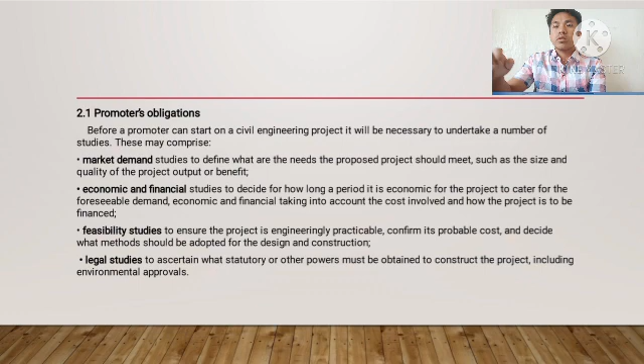These include market demand, economic and financial feasibility studies, and legal studies. Let's go on to 2.2 Importance of feasibility studies.

Feasibility studies of an engineering nature are needed for most construction projects. In the initial stage, the studies usually concentrate on various options for the location, design, and layout of the project. Site investigations are particularly important, and sufficient time and money should be spent on them.

The feasibility study should include a close examination of data on which the need for the project is based.

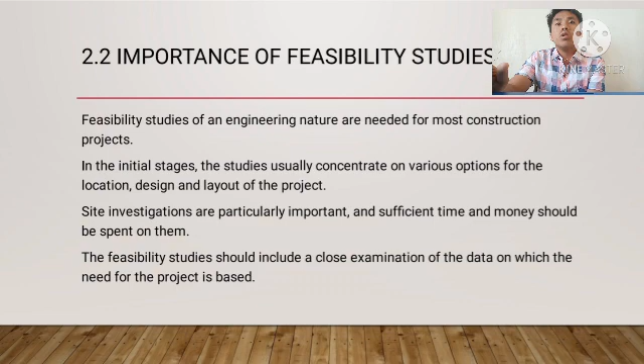The feasibility studies should include a close examination of the data on which the need for the project is based. Let's go on to 2.3 Options for design. There are four kinds. Number 1 is design by promoter or a consultant. Number 2 is outline design provided with details designed by others. Number 3 is layout design by promoter, and number 4 is functional specification by promoter, design by contractor.

Let's go on to design by promoter or consultant. The whole of the design, including all drawings and specifications, is completed before construction tenders are sought, except for drawings not needed for tendering purposes, such as for concrete reinforcement.

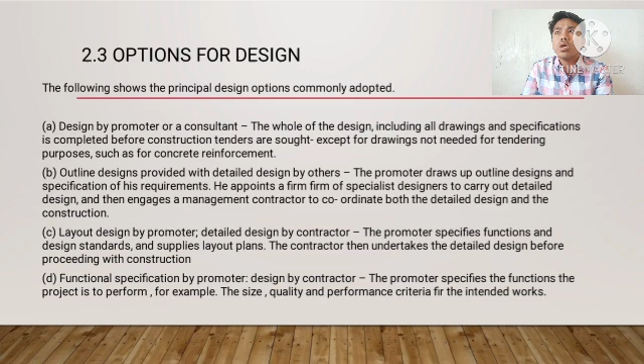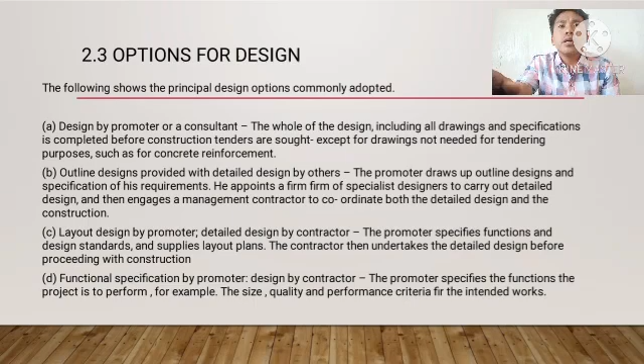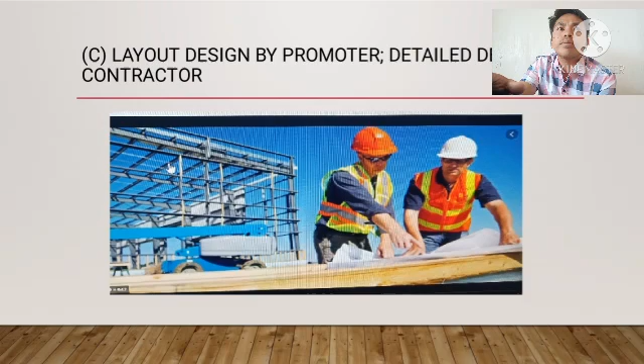Let's go on to the pictures. Design by promoter or a consultant. Outline design provided with detailed design by others. Layout design by promoter, detailed design by contractor. And functional specification by promoter, design by contractor.

Let's go on to specialist suppliers. They need to design their product or services to suit the project. Here are the advantages: the promoter can check all aspects of the design to ensure they meet his requirements before construction starts. Number 2 is competitive tenders for construction are obtained on a clearly defined basis, encouraging construction contractors to

submit the lowest price. Number 3 is the risk of having to make alterations to the work during construction is minimized, giving a better chance of the project cost not exceeding the tender price. The promoter is not committed to proceed with construction until he sees tender prices and accepts a tender.

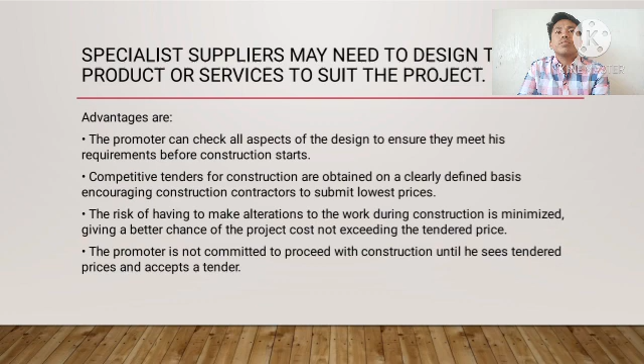Let's go on to design and construct. Design for a water tower. The advantages are the contractor can adapt the design to suit his construction equipment. His usual construction method enables him to tender his lowest price. The cost of making design alterations during construction does not fall on the promoter.

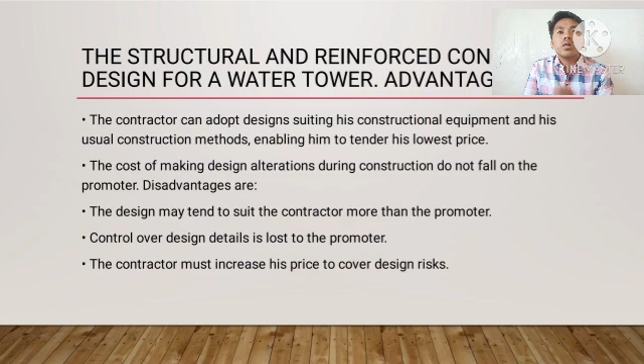The disadvantages are the design may tend to suit the contractor more than the promoter. Control over design details is lost to the promoter. The contractor must increase his price to cover design risk.

Let's go on to 2.4, option for construction. 2.4, option of construction.

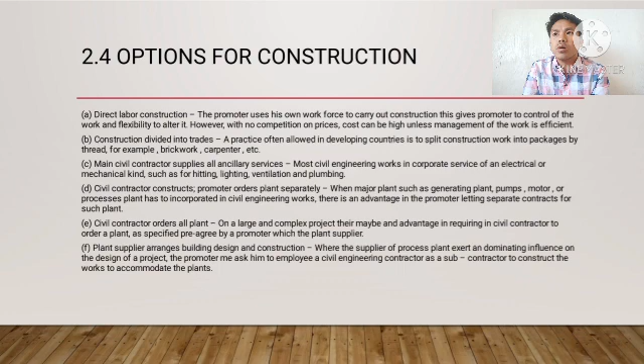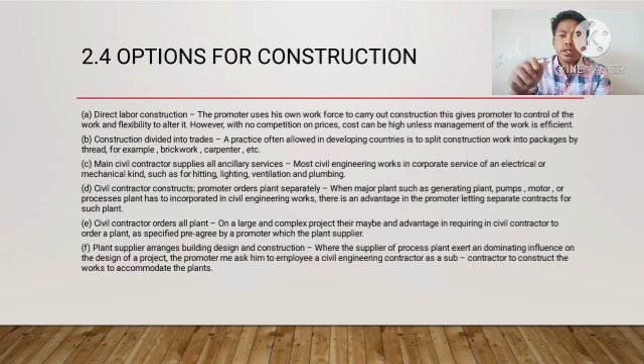Let's go on to (e). These are the advantages: the civil contractor can be left to arrange delivery of pieces of plant to suit his construction program; number 2, the civil contractor has direct contact with the plant supplier to agree to the details of any storage or lifting requirement; and the promoter avoids the risk of delaying the contractor by the plant supplier not delivering in time.

Disadvantages are: the plant supplier will not start manufacture until the civil contractor places the order. To complete the civil works design, the promoter may have to pay the plant supplier a fee for providing layout drawings in advance. If the promoter asks for some alteration to the plant, or a works test on the plant shows the need for some amendment, delivery may be delayed, causing the civil contractor to claim for delay. The plant supplier may increase his charge if he thinks his risks will be increased by having to rely on the civil contractor's payment.

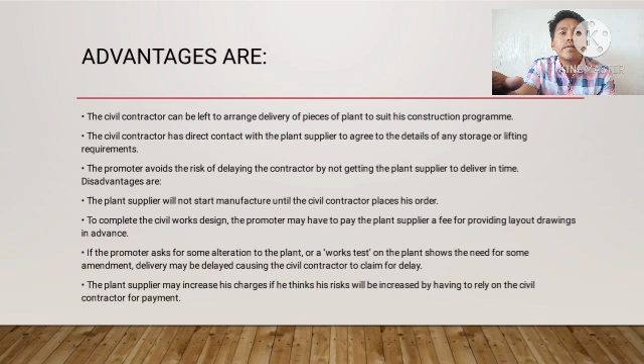If the plant supplier arranges building design and construction, where the supplier of process plant exert dominating influence on design of a project? The promoter may ask him to employ a civil engineering contractor as subcontractor to construct the work to accommodate the plant. As I said earlier, plant supplier arranges building design and construction.

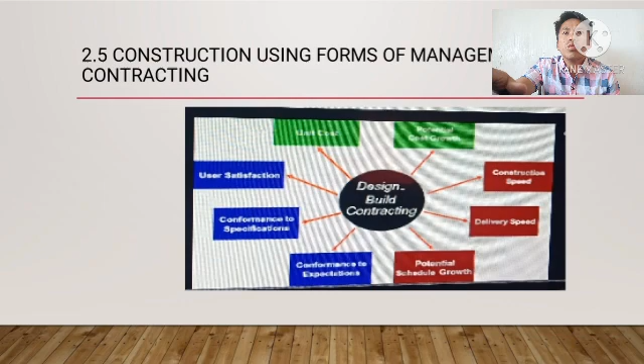There are two main forms of management contracting. Number one is construction management, and number two is management contracting. Construction management: the term is used to mean the arrangement under which the promoter appoints a manager with his own staff to organize the letting and supervision of construction contracts which are placed by the promoter. An advantage is that an experienced construction manager should be able to avoid or minimize the problem of coordinating constructions.

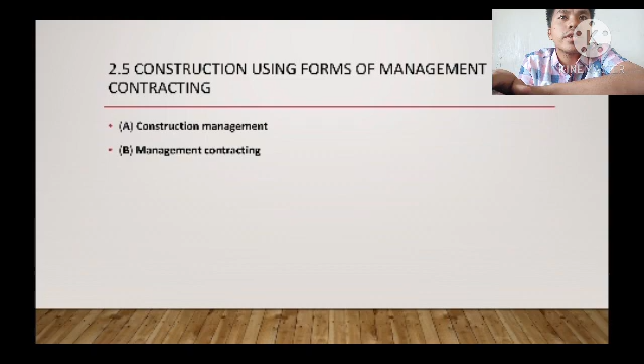Let's go on to 2.6, design and build procedure and other options. There are 5 kinds. Number 1 is design and build or turnkey contract. Design and build and turnkey contracts of this type are often for a lump sum, which can suit a promoter who wants certainty of price and who can be given a clear idea what he is being offered.

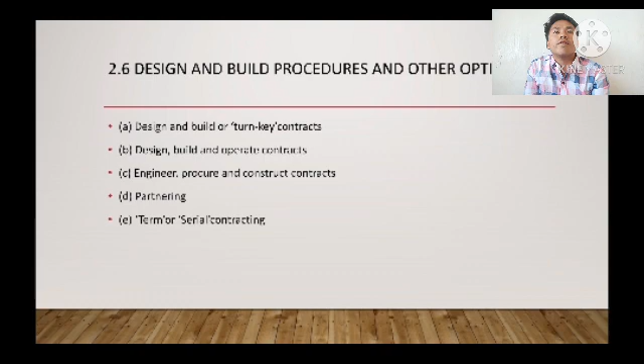And fifth is term or serial contracting. Term or serial contracting comprises letting an ordinary contract for carrying out a series of works of an identical nature, resurfacing roads, for example, for a given period of a year or longer.

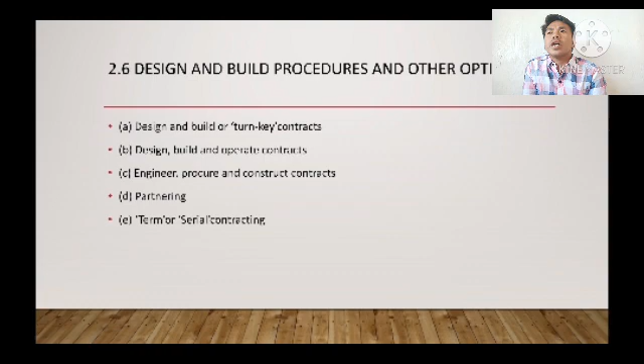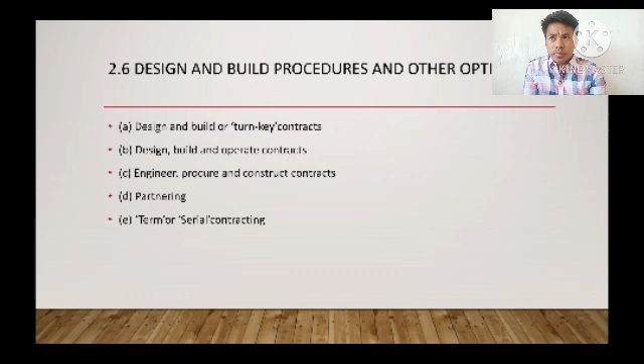And 2.7, comment on possible arrangements. A comparison between the two most commonly used methods of developing a project: completing design first and letting contracts for construction. And that is my report.